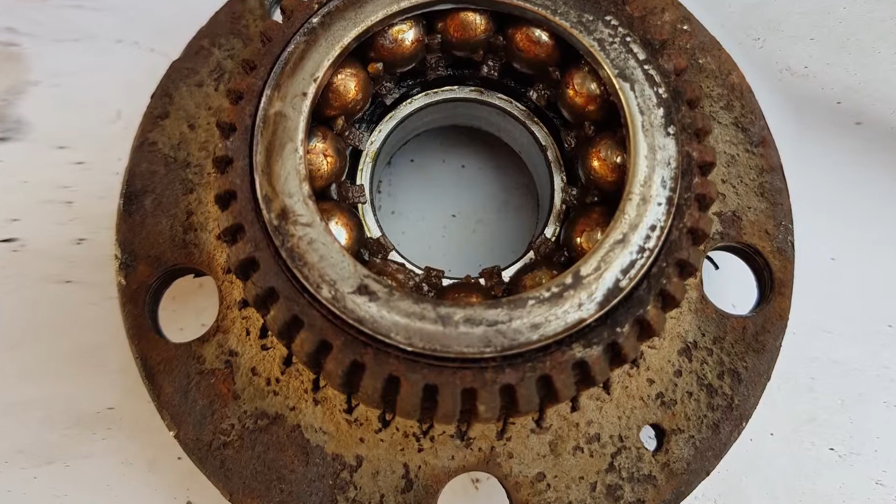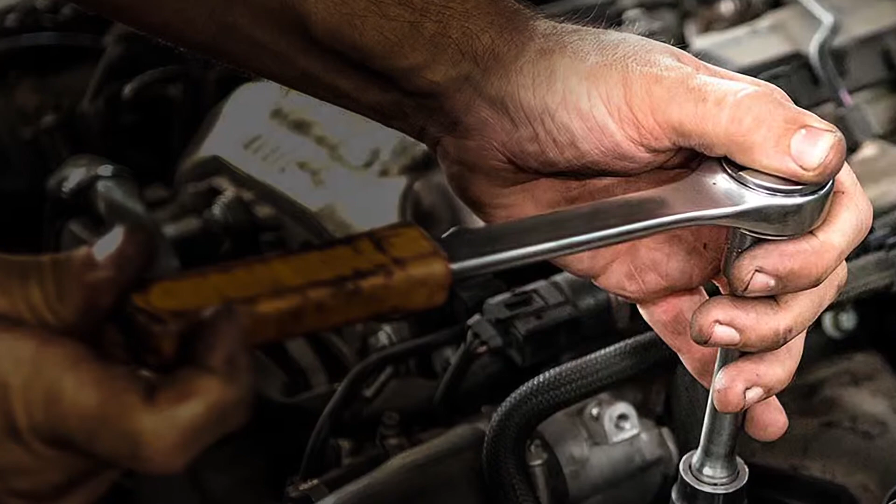Systems and machines have their own limited service life. It has always been the goal to improve the maintenance efficiency of any technological asset. The efficiency is improved when we use less time on downtime, reduce the maintenance efforts, and thus reduce the impact on our environment. Too many fatal accidents have occurred where there should have been none.

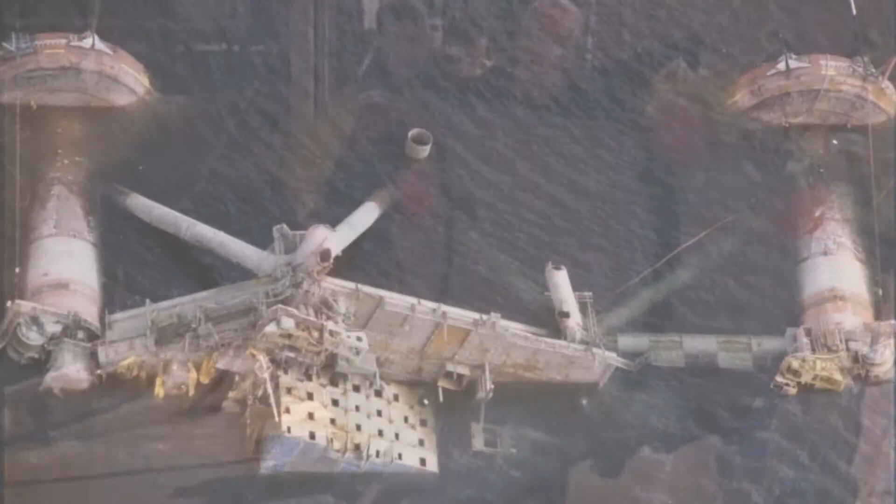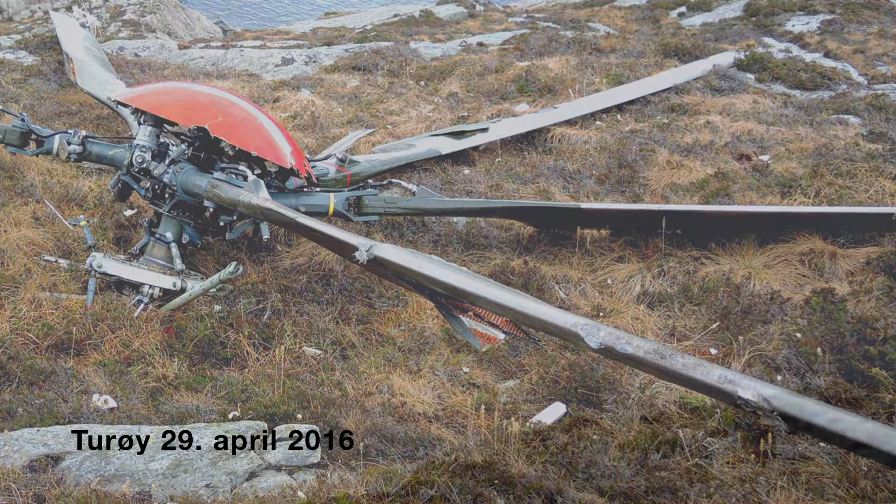The crash of a DC-10 aircraft in Sioux City. The helicopter crash in Peterhead, Scotland. The collapse of the Alexander Kielland oil platform in the North Sea. The crash of the Super Puma helicopter in Turøy, close to Bergen in Norway, are but a few of the many unnecessary incidents. Several hundred people have died in these accidents.

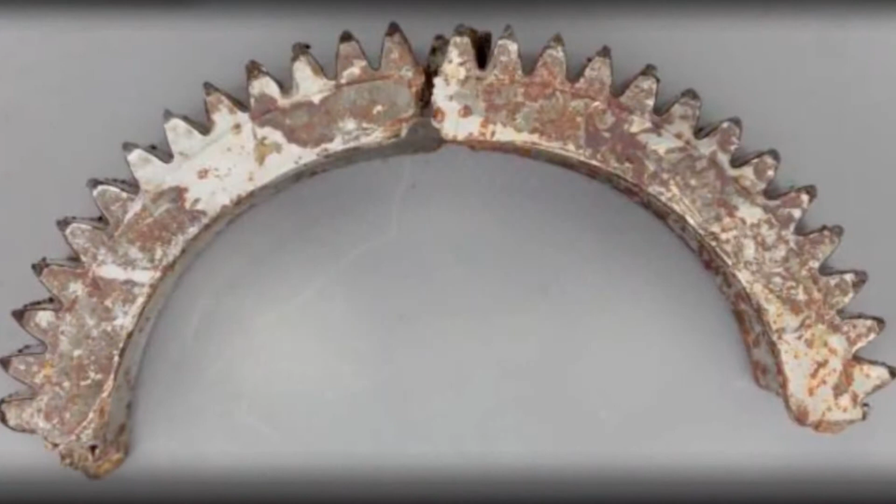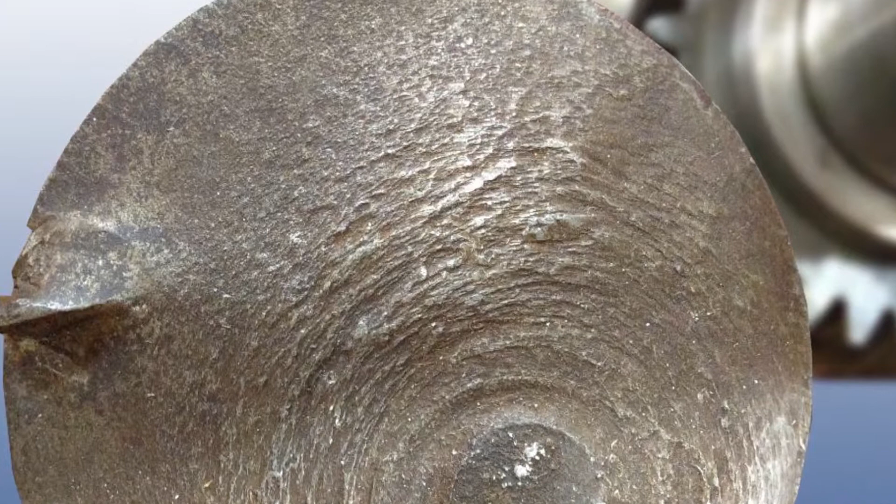So what is the source of these failures? Investigations have shown that these fatal accidents were due to material fatigue. So why could not smart engineers have prohibited these failures? Material fatigue is due to repetitive stresses in the material. These stresses, when repeated many thousands or millions of times, do not need to be above the material yielding or fracture limit to cause collapse.

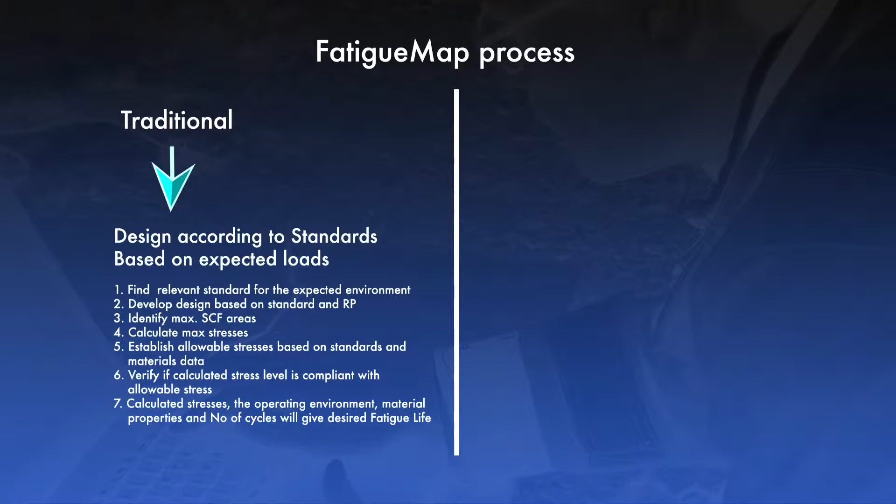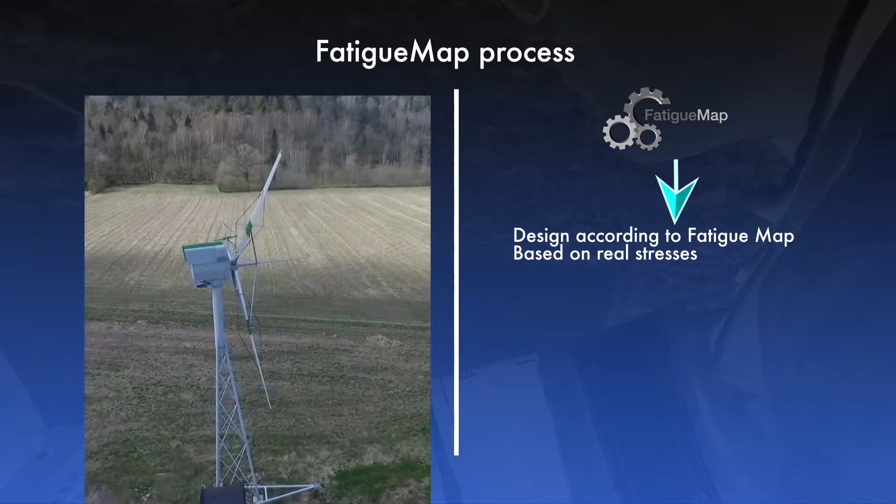Dinova has developed a process that will prevent such accidents in the future. The process, FatigueMap, will take the steps beyond the normally used process of designing the structure to withstand the expected loads in a given environment. FatigueMap will monitor the real stresses and thus foresee when the next maintenance is necessary, before a catastrophic failure occurs. The process has been tested on a land-based windmill and the results are very uplifting. In this way, a proof of concept has been established.

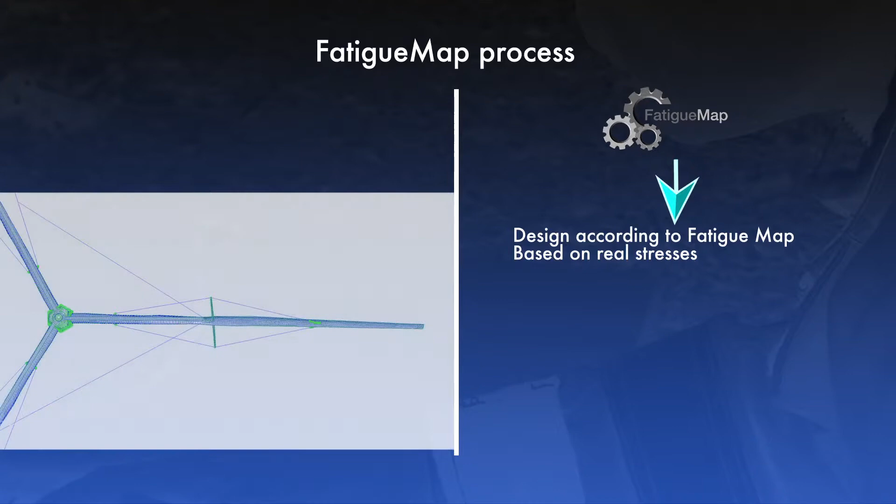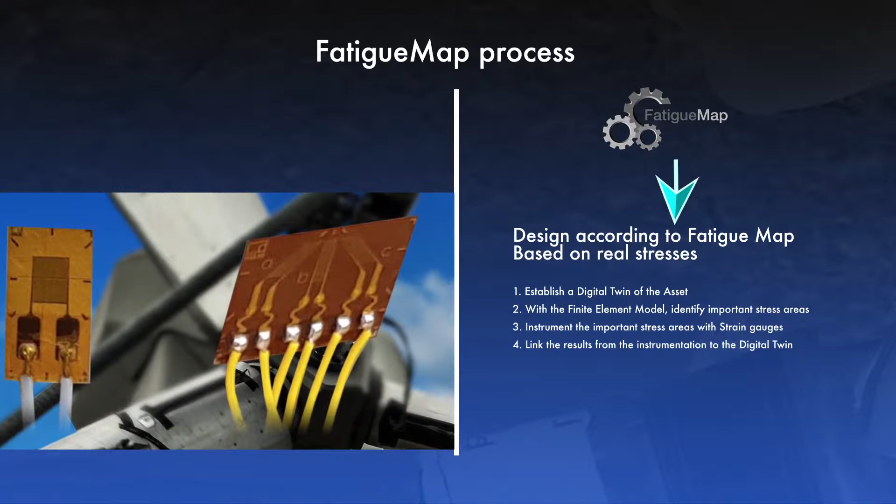The steps in the process are: establish a digital twin of the asset, in this case, a windmill. The digital twin is a finite element model. With the finite element model, identify important stress areas. Instrument the important stress areas with strain gauges. Link the results from the instrumentation to the digital twin. The digital twin, together with the monitored data, will follow the asset over time.

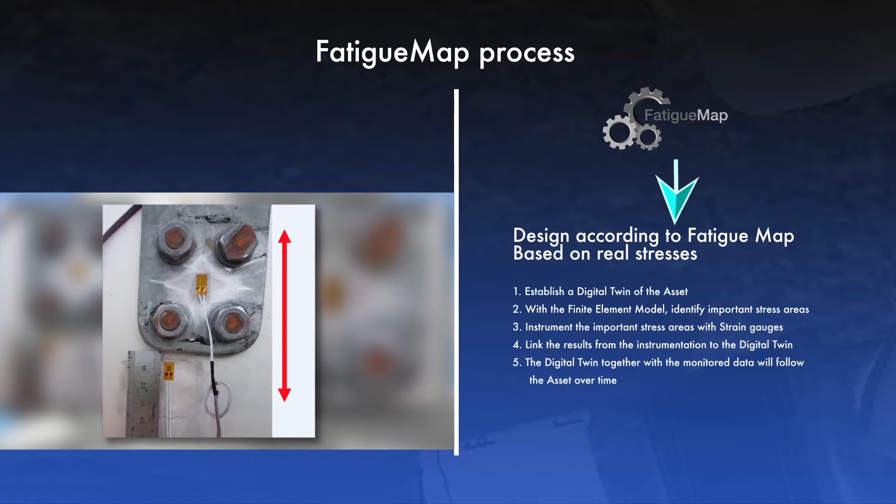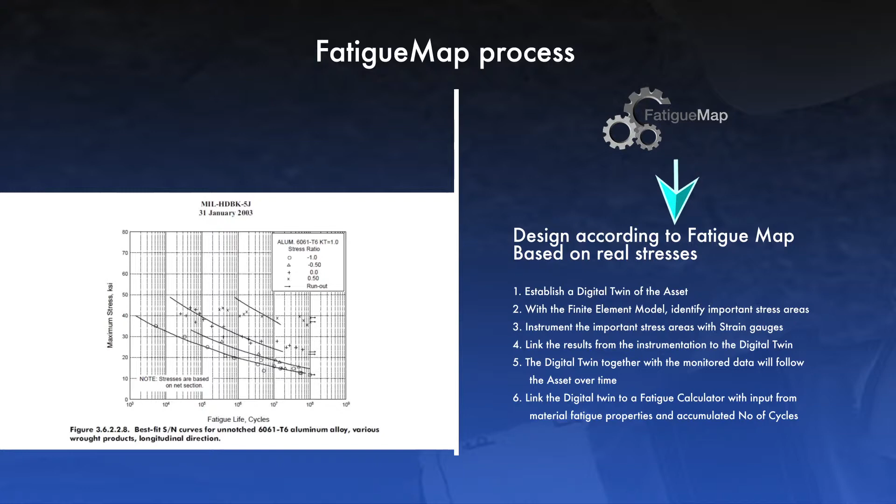Link the digital twin to a fatigue calculator with input from material fatigue properties and accumulated number of cycles. FatigueMap establishes a continuous link between the monitored data and the digital twin by means of big data and Internet of Things, continuously calculating the remaining fatigue life.

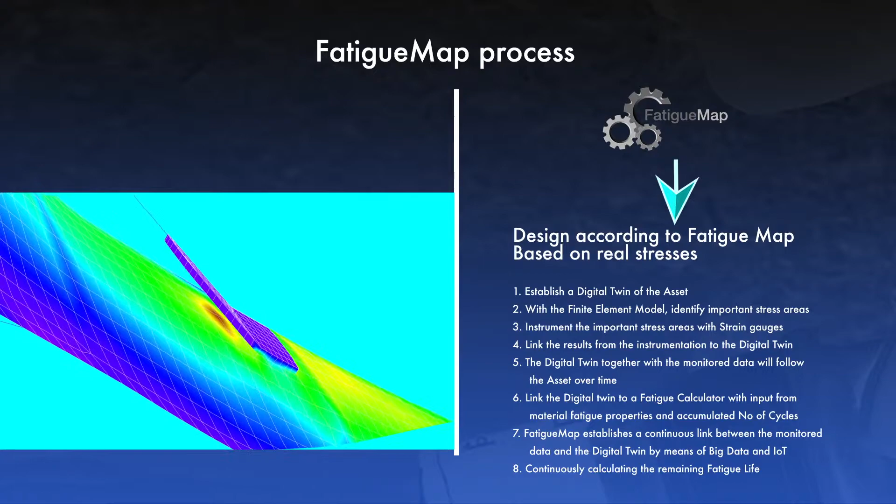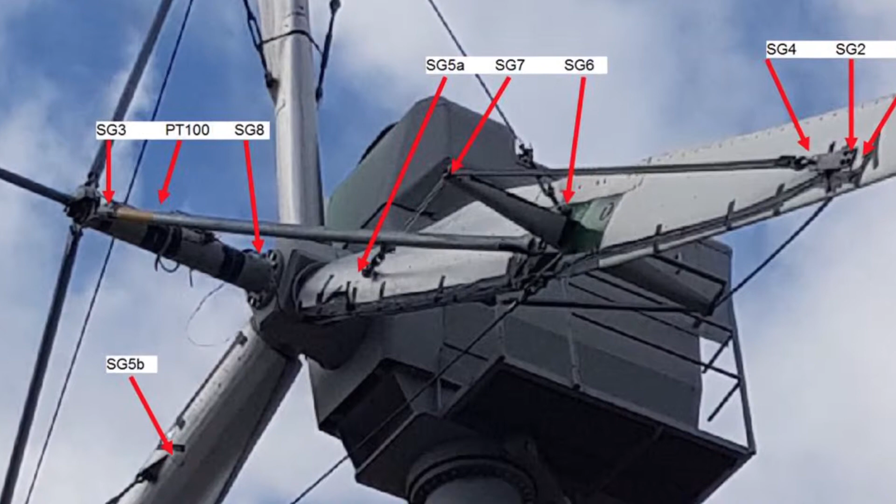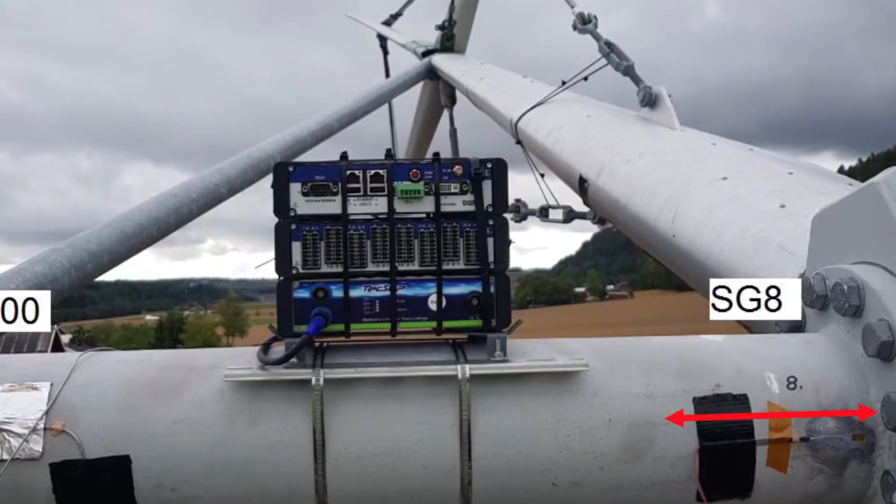Several locations are instrumented, both locations with high stresses, red areas, but also locations with low stresses to verify the results. The sensors were mounted at correct locations to correlate with the results from the digital twin. The logging equipment with computer, battery, and amplifier was attached to one of the windmill wings.

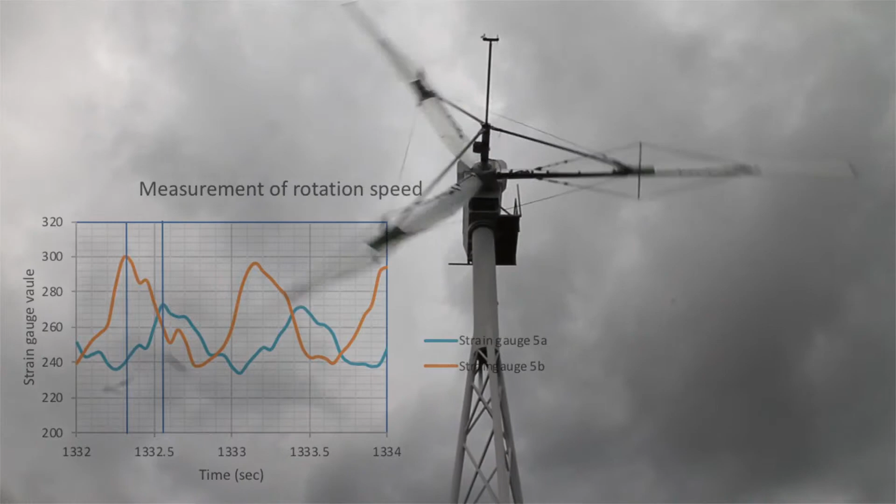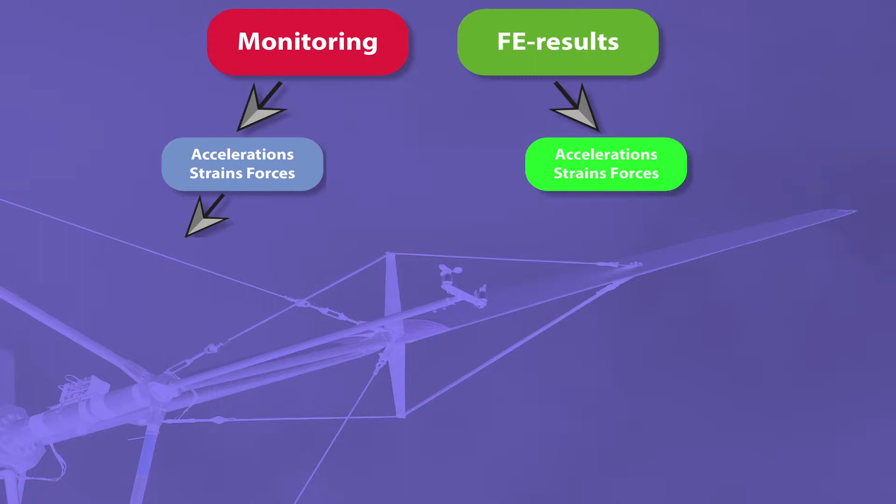With everything mounted, we are ready for measuring. The measuring results have to give information about windmill rotational speed and wind velocity and direction. The measured results and the information from the digital twin will give an exact picture of the fatigue life of the system.

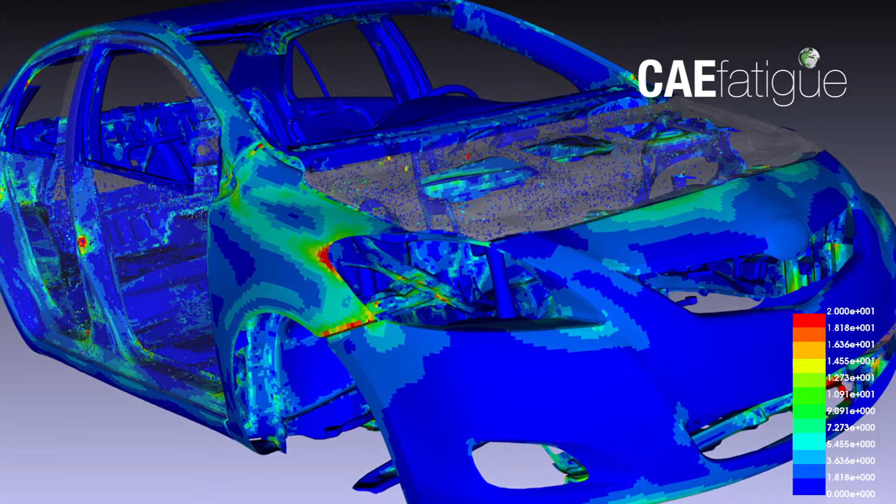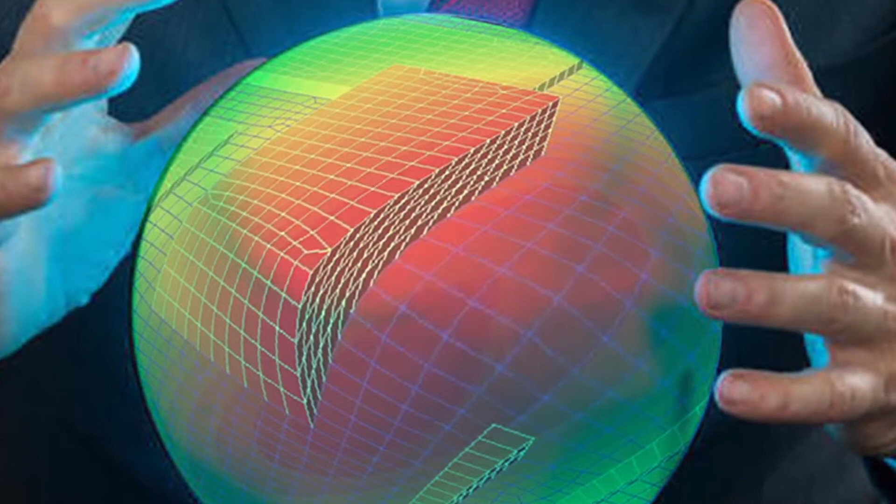The process has been tested on a land-based windmill, but the concept can be used on any dynamic system subjected to fatigue damage. Applying FatigueMap on any system subjected to fatigue loading will help you get a look into the future. Prevent fatal accidents. Reduce unnecessary loads on the environment. Reduce the number of unplanned maintenance stops. Reduce maintenance time and costs.

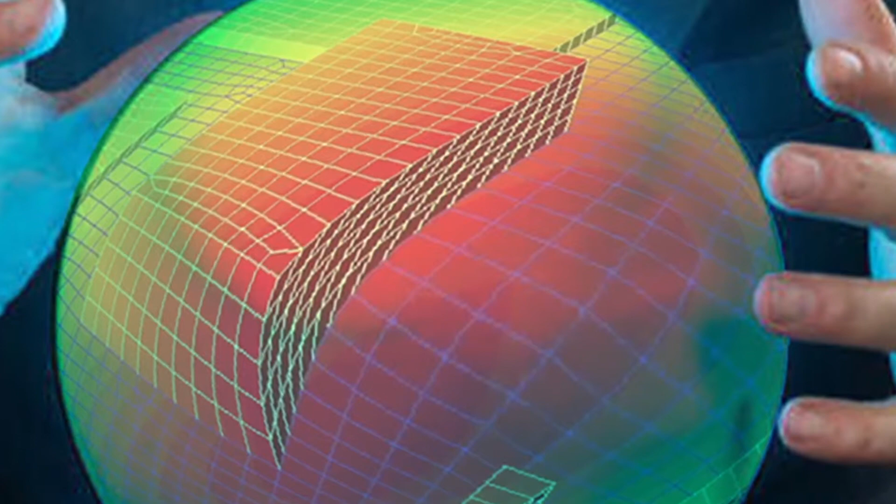Reduce environmental footprint. And thus, from this information, you can learn to select the best material for the system, optimize systems design, change design philosophy, save time and money, and above all, save lives. Using FatigueMap will give full control before accidents happen.